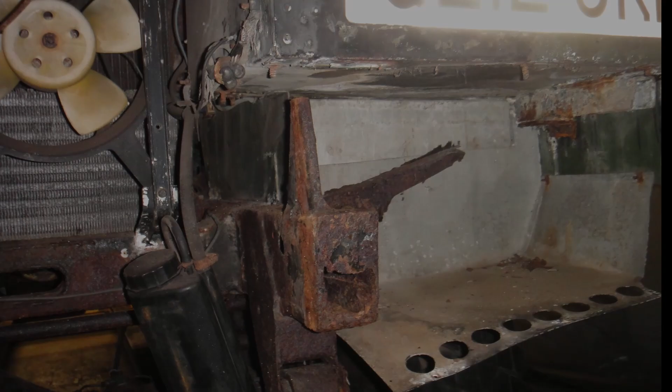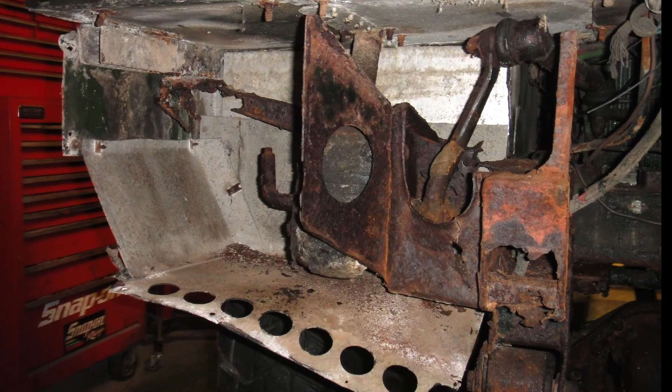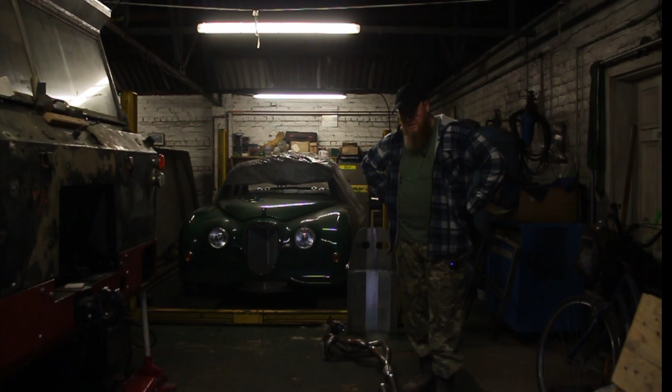Welcome to another portion of this Mk2 Jaguar wide-body two-door coupe, which I'm on with, and the Land Rover. I'm going to touch upon both and show you what I've been up to.

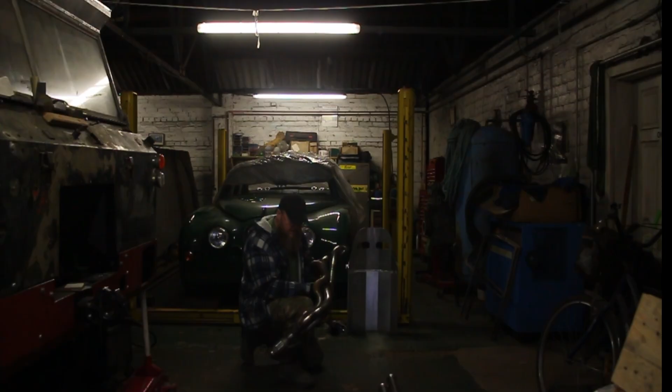So this is a forward set of headers, which I've probably shown you before, and I'll show you a close-up of that. I've welded all these up. What I did was, to make sure I could weld everything up, I removed this middle section of pipe so I could get everything around, and then I put it back in and welded the ends. So I welded all that pipe up as well, and then I just had to run round. So that's that one done.

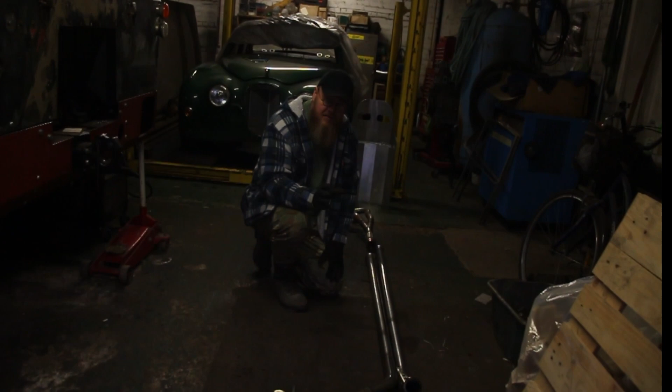Then the centre section - I haven't put anything in this. This engine originally didn't have catalytic converters in it. The later XJ40s, and I'm not sure about the XJSs, did put catalytic converters in, but this engine didn't run with them, so I've not put them in. And I've not put any centre section silencers in either. So I'm going to see what it sounds like, but I have got enough space to put some cherry bombs in, I think that's what they call them, which will just take the edge off a little bit if it's a bit too raspy. But anyway, so the centre section comes up to the IRS and then it's spread out and over. So this is the near side.

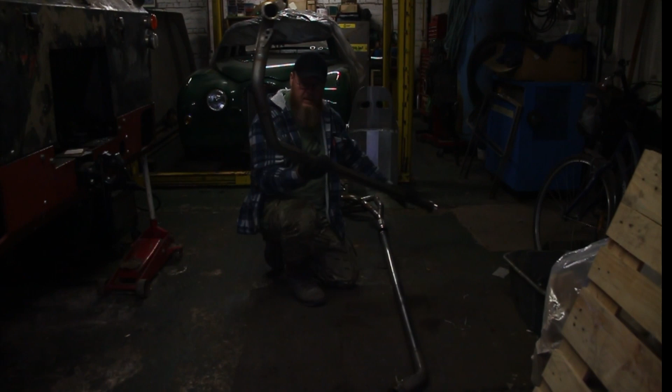So this is the near side. That's the near side one, and you can see how it comes over to the near side to come over the drive shaft.

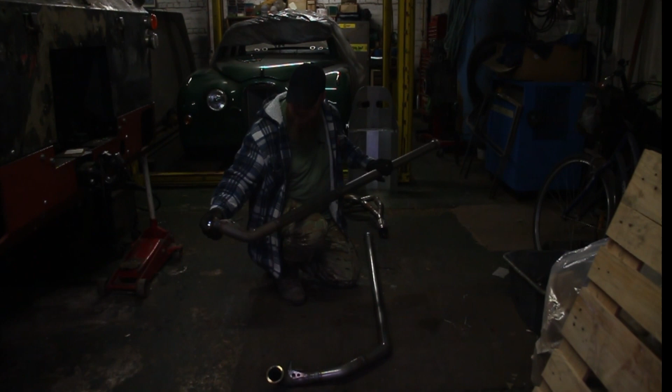The brackets I made are all stainless steel, so the pipe's all mild steel. The ends, they were supposed to be, well I thought they were stainless steel, but they're not - they're just mild steel plated, so I had to machine those to clean them up and to fit onto the pipes. But the brackets are stainless steel, which I made, so I didn't want to paint those, and same with the offside. So made the brackets, they're all stainless steel, welded onto mild steel. So that's the offside.

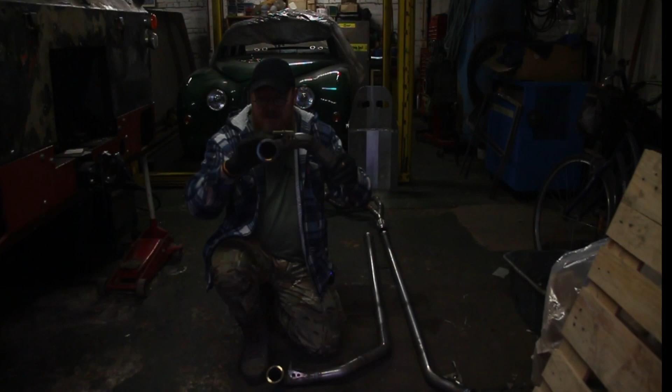Then the part comes over the actual drive shaft. This bracket here with the pin - there's a rubber mounting point inside the IRS that slides into it, so that holds it in position. Again that's all stainless steel onto mild steel pipe, and I'll tell you, those were awkward to make, to get that thing into the right position to sit on there. So near side, offside are slightly different in the bend, just because of the way it comes from that and everything, but they're pretty much identical.

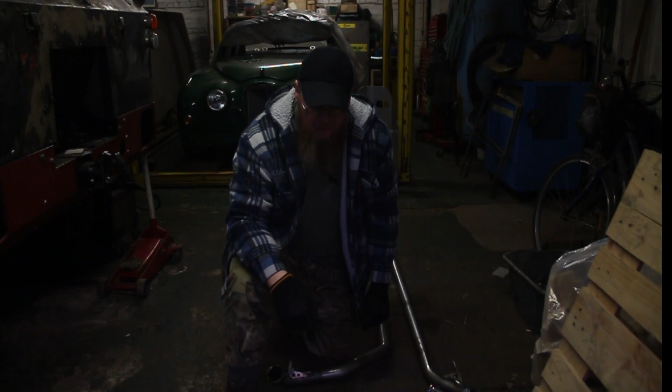So offside, and then the coupling - the two pipes that couple the ends that come over the drive shafts - and the V-band clamps. I'm sure I've shown you them, but they're under the Jag and I'm not going to lift it up just to get those out. But I'm sure those who know anything about making exhausts know there's a V-band clamp which I use for these. They just clamp and then they lock up.

What I did as well, I wanted - well, I've made these - but I tried getting some sealing slip joint pipes, and the company I inquired with for the size I wanted only had one in stock. And when I was in contact with them, I was asking them when they could tell me they'd have another one in.

So I wanted a pair, because I need a pair, and they wouldn't even get back to me until about 3 months. But by that time I was like, I need to get this thing done.

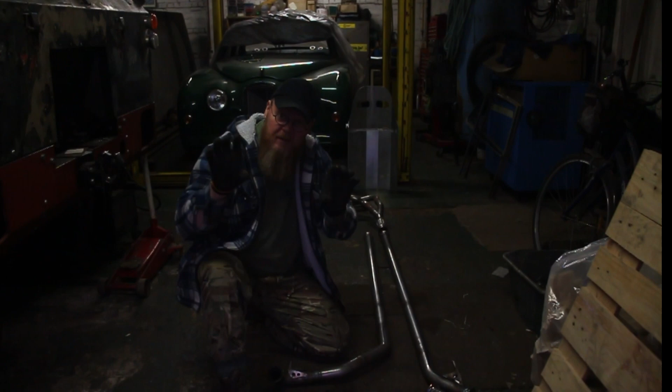So what I did was I went to work. I got some of this 2-inch pipe, put it in the lathe and machined it down, just touched it off to make sure it was perfectly round, because this is seamed pipe, not seamless. I made sure that was running concentric on the lathe. Then I had some old prop shaft, which was just right to be machined out to make the female part that goes over. Let me just get this here.

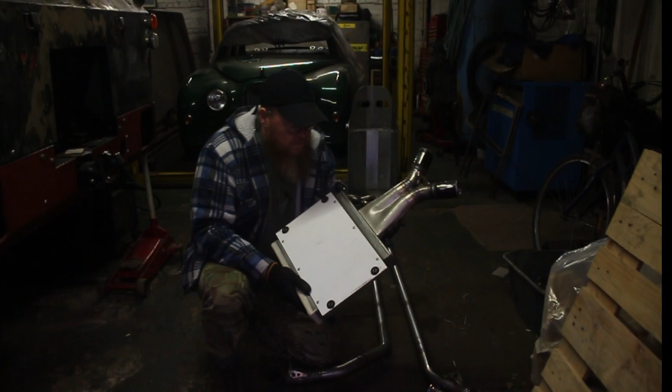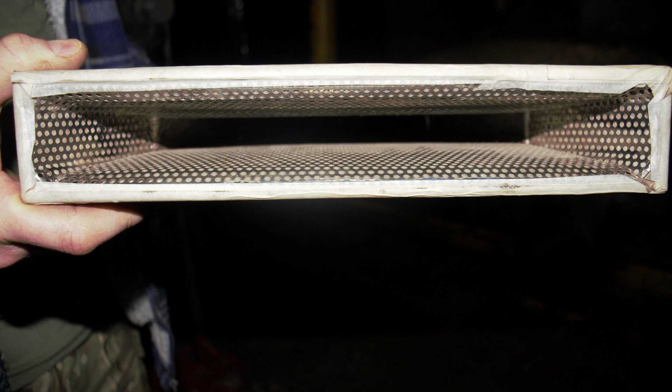So this is the rear silencer, and this is a fishtail, believe it or not, inside there. You can see where it starts to taper out, it comes down to there like that. I'll try and get some pictures to show you more clearly what you can see inside, and the meshing I've put in for the silencing, and for the gas to expand into this silencer box bit.

But anyway, so like I say, I machined these so they literally just go in like that, and that's their machine fit, and they seal perfectly. They won't even need anything on to seal these. So I don't know whether I will put something on to seal it or just leave them.

There is no restriction, obviously, because it's pretty much straight through. There's no baffles in here, so I don't think they would leak even if they were. But I don't know with the expansion rates, with the heat or what, I don't know, but we'll see.

But they needed to slide in, because when the diffuser's in, this sits inside the diffuser, and you literally can't get into it. So even if I had some V-bands or anything on it, I couldn't tighten it up because I can't get in. Which I know some people say sounds a bit silly, but it's not really, because I can put these slip joints in and they can go in and they seal perfectly well.

So that should be what it is, but we'll get some pictures. I've got a picture of the whole thing, which I'll put in the top corner. So that's the exhaust system done.

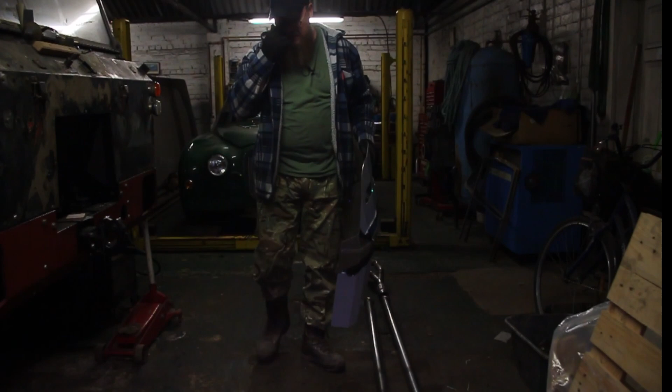The chair. Now I said the chair that I'd got and done. In fact, I'll bring it out. Just one second. Right, so the chairs that I bought. This was a chair that I bought.

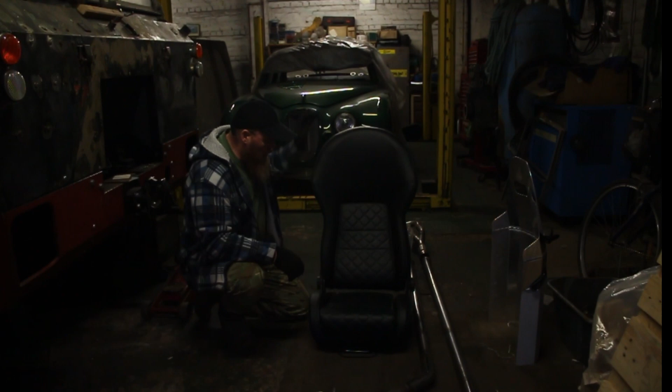I bought it so it could tilt forward, obviously, because I've got seats in the back. I wanted a bucket-like seat, but there wasn't anything really exactly what I wanted that would tilt forward, except normal modern car chairs, which I didn't like. I wanted it to look sort of sportish, but not too much, but have that thing where it would make the car somewhat accessible into the back, and yet still have that touch of sport in it.

These were the things that I found. I recovered them in leather, so all the stitching work I did. This was my first stitching job on the sewing machine I bought. I do have the pieces, I don't know what you would call them, where the belts come through. There was one there and one there.

Goes on there. Well, I made some aluminium ones because I didn't like exactly the shape and design, so I remade those slightly. But the width of it is really wide, because the car isn't that wide inside, and it's really close to the B-C post. And when the other chair's in, there isn't much of a gap, and I didn't really like this bit here. So I decided that I was going to make some

bomber seats. So I'm going to keep the lower half of this, and let me just move this out of the way. So I've started making this. So I designed this on CAD.

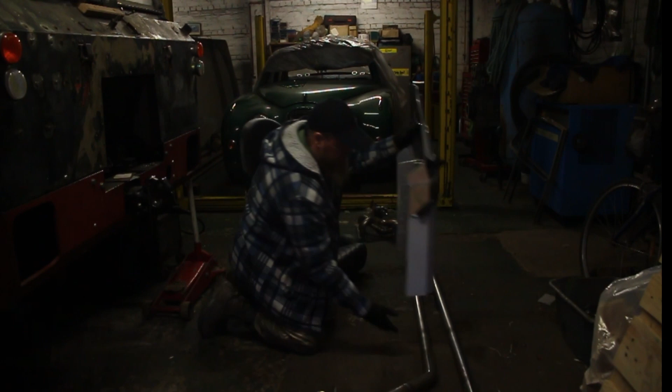I'm going to change it slightly, this edge here. I'm going to take this bit off here, cut it down there. But it's going to be covered, pretty similar to that. I've still got quite a bit of work to do.

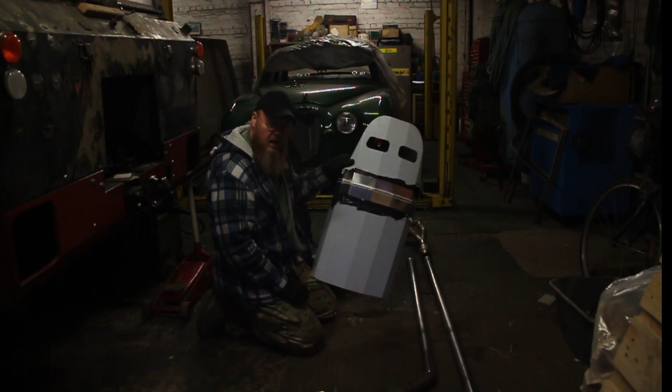So I welded it up there. There's going to be some frames coming down the back of here. Not sure if I've shown you on one of my other videos, the CAD work I did for this. I think I did, but I might put some pictures of that in as well, so you can see what it will look like. But this will go onto the, let me just bring this chair back here a sec.

So the hinges here, when I finish the bracketry on this side, this will bolt straight to that. And the idea is to do bomber seats, because they used these in the old racing cars, bomber seats.

Because it's so dark in the car, being black and green, it's really dark in there. So I thought one way to help lighten it up a little bit would be aluminium. Even though this will be mostly covered, if not all covered here, at the back it'll be all aluminium. That should help brighten things up, so light reflecting off it should help bring up the light in the car. It'll add a new dimension to the inside instead of just being all covered. So that's what I've got there, and that's the reason why I'm doing that.

And like I say, it narrows off here, so it doesn't look as if the car's all full with just this, because it is really close to each other with that. So that's what I'm going to do with that.

Right, so one of the things I've done is I bought an oil pump. This came off eBay, I think 20 quid or something silly, not a lot really. It's 12 volt, clips onto your battery, and I got this to prime the engines, both the Jaguar and the 101.

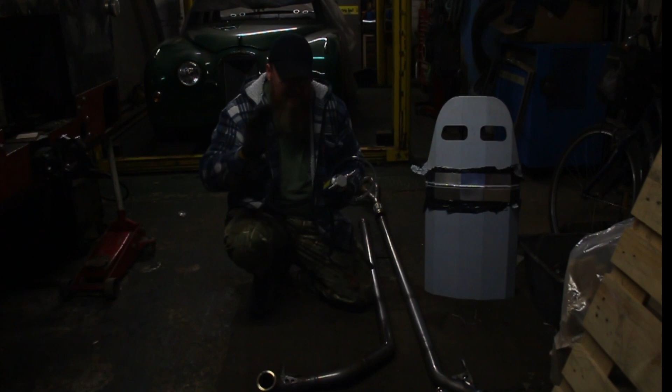So this will be doing the Jag and the 101. Dead simple, instead of messing around with hand pumps or just crossing your fingers that it's going to work.

Once I've got - what I did say was why the other runner isn't here - but just get this, hopefully I'll be able to show you.

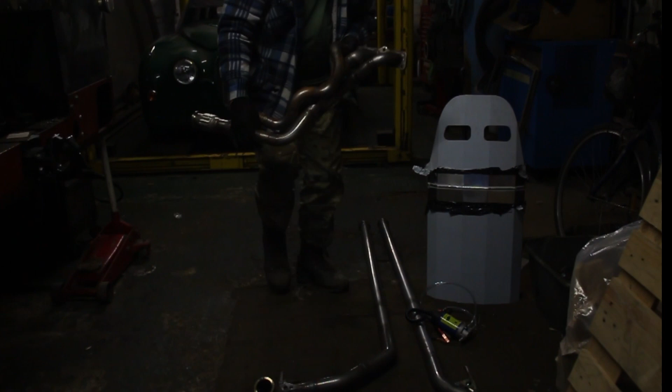Where I welded from the flange to the pipe, I had very little accessibility into the back. So when I had the centre pipe out, I had no problem welding it up. Even this one was okay when I put it back - I had enough accessibility to get in, just.

But the other one is tighter, because of the footwell that comes into the car. So I brought everything closer in, and I was hoping that I had enough access from the back here, but my TIG torch can't get in.

So I've welded the insides, and these will all be ground out so it's running flush and nice. But I don't want to just do that on the other one.

So what I've done is taken it to work, and we've got a smaller torch on one of the TIGs there, so I'm going to try to get in with that. If I can't get in with that, then I'm going to oxyacetylene weld it in. But I've not done that yet.

Christmas came up and that stopped me doing that, because I've had so many other things to do at work - I've just not got round to it. So that's why the other set of runners isn't here, because they're at work, just to finish that last bit of weld off. Once I've done that, I was going to get these ceramic coated, but I think I'm just going to paint them, to be quite honest with you.

So let's show you what we've got on the Land Rover, and then we'll wrap it up. So the Land Rover wheel stowage - said I'd show you the finished design. The only thing I've not done is the lock, which will hold it in position when it's stowed away. I've not decided exactly where that's going yet, or how it's going to be, but we'll see. I'll show you the stowage, and then I'll show you the formula.

It's an online thing that I use to work out the lever actuator force required to move the wheel into position.

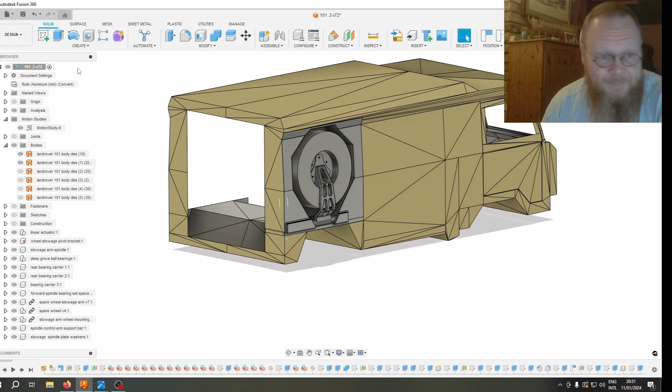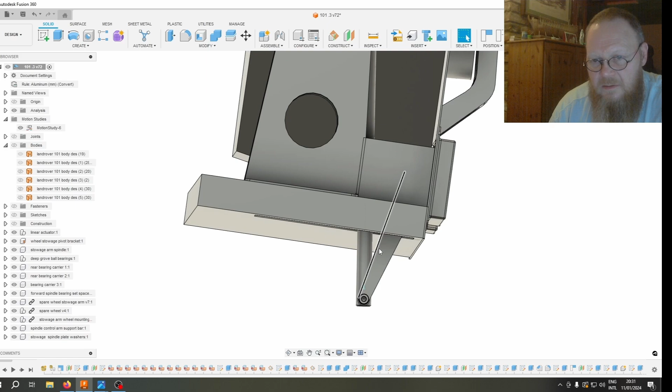So anyway, so we have the Land Rover - let's get rid of the body, and we'll look at the mechanism in a bit more detail. So you can see the mechanism here, or some of it. There's the actuator there, or I should say actuator lever. And there is the actuator itself, hidden inside this tower which I've made. So just a simple description of it.

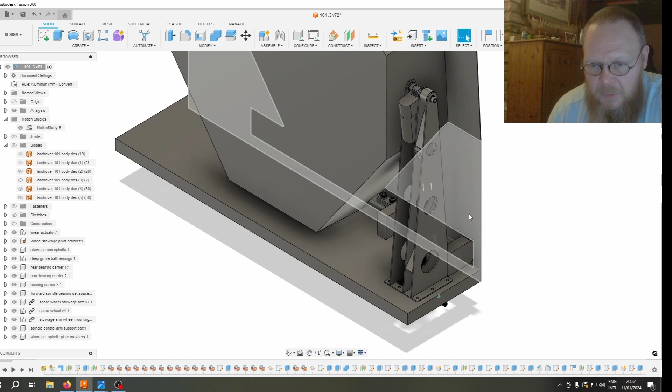I know it's pretty much self-explanatory, but what we have is this somewhat box section piece here. Instead of putting a plate down either side to make it into a box section, I've put this - let's see if I can show you - this highlighted S-type shape thing. That's sat in between the two plates, as you can see, and that'll be welded into it, and that just stops it splaying out.

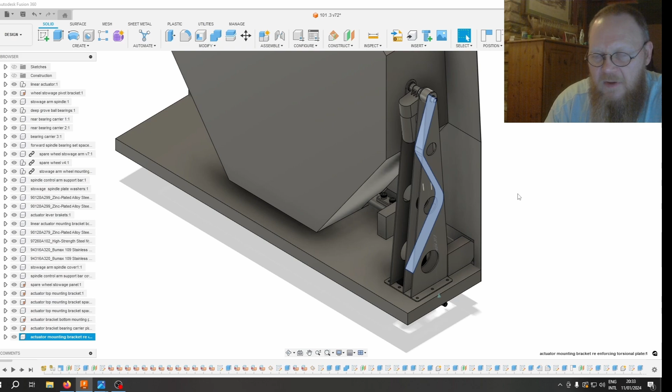Even though it's under extraction, it's being pulled apart because obviously when the wheel's being levered up, the actuator wants to move upwards, so it will be pulling on this. I didn't want it to be moving and buckling around, because this material is only 3mm thick. So I put this structure inside just to help support it, so it can't move from side to side, to cut down on any possible torsional movement. It should keep it relatively light, and it moves the stresses from one side to the other, backwards and forwards - just something dead simple, supporting the inner part of the structure as well.

And then I've got a single plate at the other side, which just helps support as well, pushing against it. I'd done a video of this last...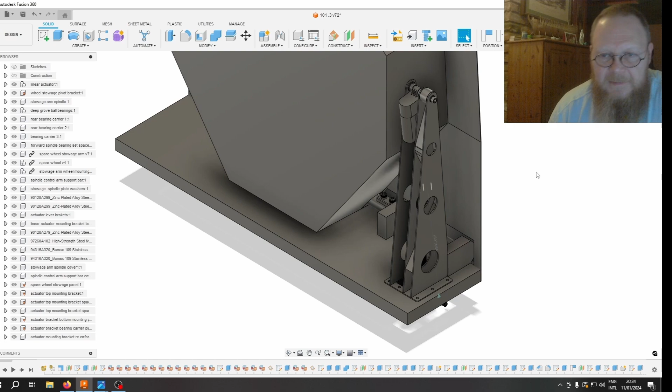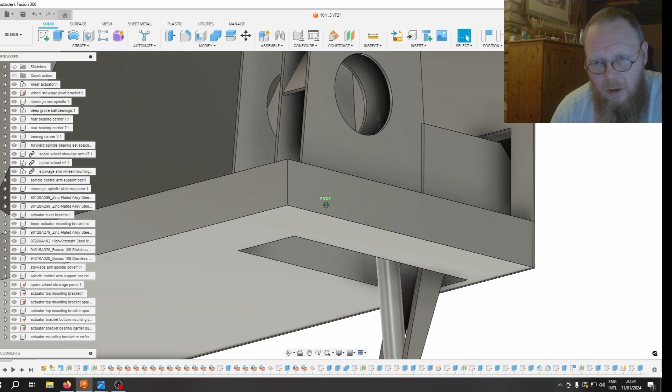Saturday. Yes, last Saturday. And then I came to realise that I got my formula wrong, and so my drawing was wrong. So when I realised what it was, I had to re-edit all this, and the actuator, because of the different lengths of actuator for stroke. And I got the wrong stroke - so this lever arm here, what the actuator goes onto, this actuator rod, I'd made this 100mm long. And I made it that long because the calculation I'd put in allowed me to make it that big.

But unfortunately I put the wrong numbers into the calculator, which I got online. I'll show you it here - just drag it across. So this was the calculator that I used. You can see the weight is obviously the wheel, X is the lever which the wheel's mounted to, and L is the lever which I'm going to put force to, which is F, and the fulcrum point is where the top of that triangle is, obviously.

So what I did was I put in this number here, but I put it in inches and not metric. So this is correct, is this? I don't know why, I must have been playing with it and put it back onto inches when it should be on metric. But it's in pounds, so

it's 40 kilos. I've been online and a lot of people saying the wheel and tyre is about 40 kilos. I thought it was about 50, but I haven't weighed it. So I put 40 as my basic statement. So 2.2 pounds to a kilo, so you get 88 pound, because everything else is in metric.

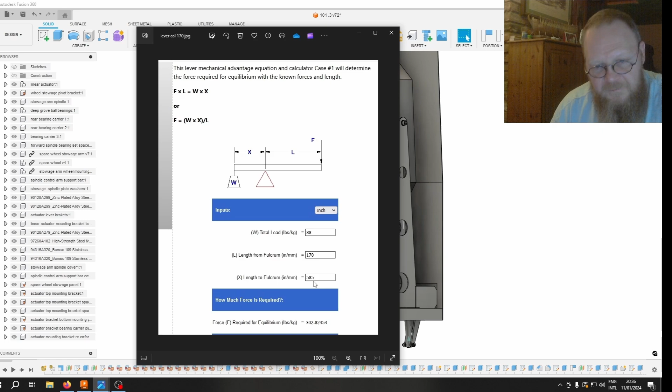So the length to the fulcrum, so that's, let me just move this over here. Let's get, in fact I better move this out of the way a sec, because otherwise it'll get rid of it. I'll have to mess around a bit. So let me pull this back.

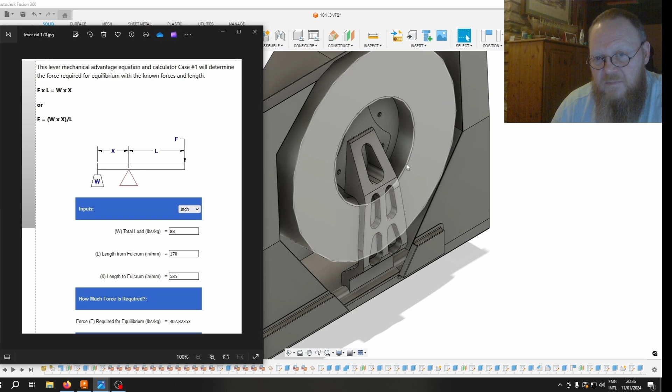So X is this here. So all this, and obviously this is the fulcrum point, is this rod here. So 585, so it's 585 I measured to there.

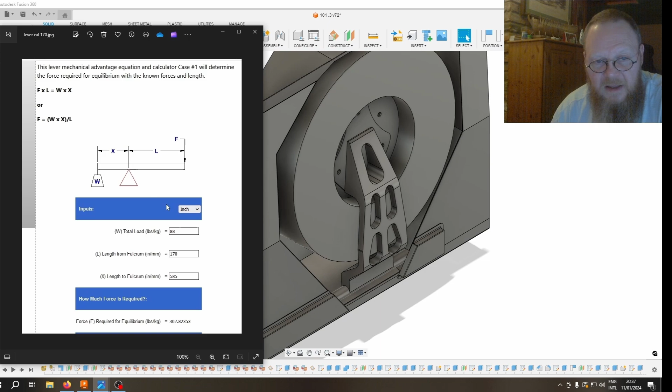And like I say, my original actuator arm was 100, but I've changed it because I did the recalculation through this, and the actuator, without going absolutely crazy, it would have been massive. And so this actuator is the most powerful one that I've found for its compact size and stroke length. So let me pull it back over again.

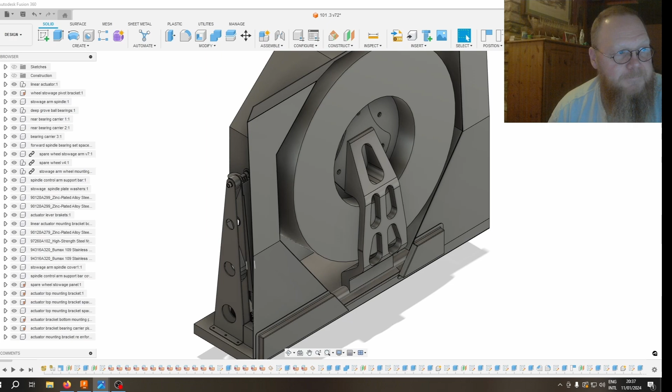So anyway, so I calculated it, and 170 millimeters, which is my L length there, would allow me to get away with this actuator I've got in here. This here, that's the actuator.

So I redrew all this using these calculations. So this calculation here says that the force required to give an equilibrium is 302.82353 pounds. So the actual actuator, let me just drag this across, explore this.

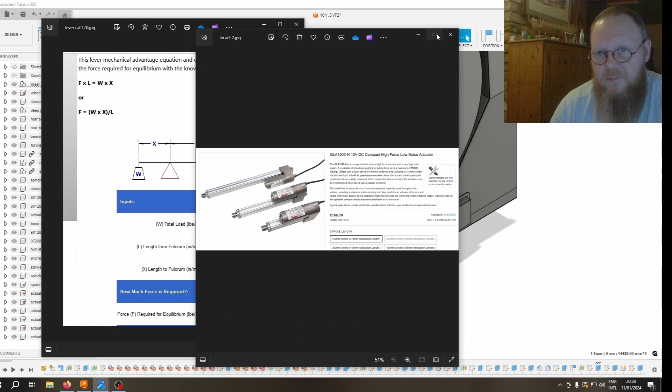So this is the actuator, and it gives me 337 pounds of actual force, or 152 kilograms of force. You can see it costs there. It's actually, they're really quite cheap, to say what they are. So it's got a 300mm stroke.

Originally it was a 200 one, but they're out of stock anyway now. But anyway, so it worked out better anyway, because I was struggling to find one until I realised the formula was wrong. But anyway, so 337 pounds of force this actuator will give.

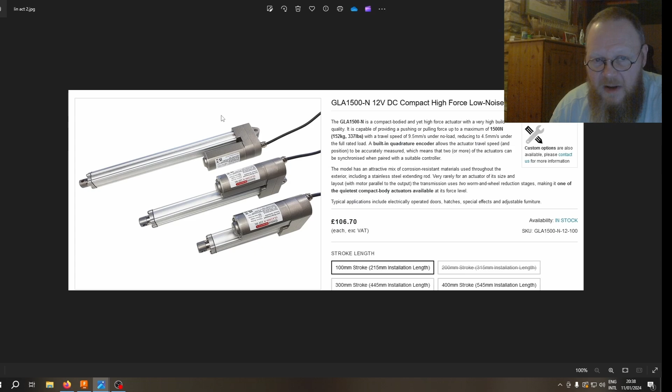So with having that, I'll get rid of that. So with having that, it meant that I had, let me just check my notes here, 16 kilos of excess force. So I needed 302 to get it to balance, but obviously I need to actuate it. So the extra 16 kilos will be what actuates it.

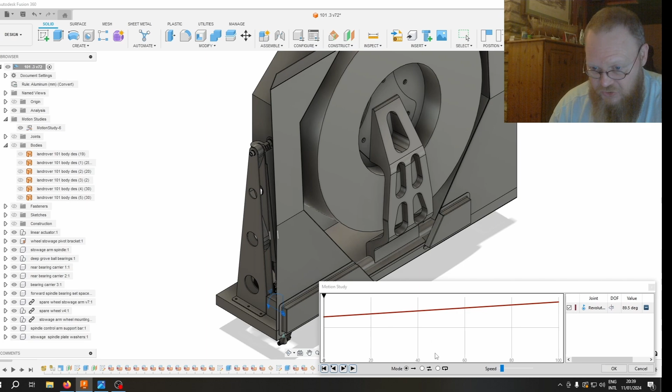So let me go back to here. Let's go into motion study, and let's just do a little bit of playing. So there. So the 16 kilos will make it do that, which that's what I'm after. And hopefully the 16 kilos should be enough to make this move without any problem.

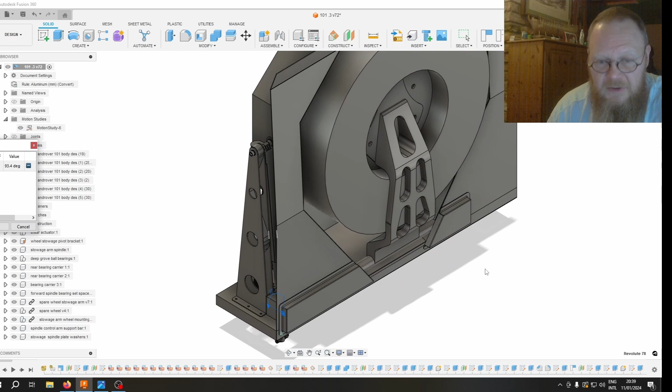Crossing my fingers. So yeah, and if it doesn't, well, I'm going to struggle because obviously the longer the actuator arm at the bottom is, let me just pull this up here. So the longer this arm is there means that I would have to have a longer stroked actuator, which means then I would have to make all these brackets again to accommodate.

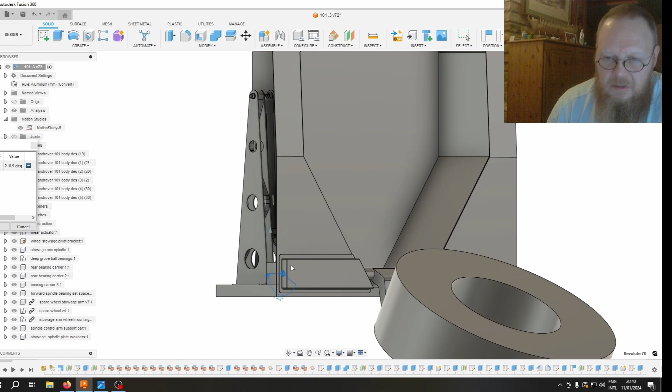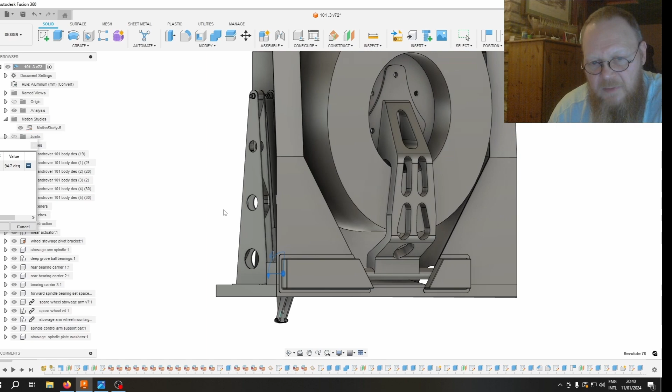I'm hoping that I don't need to do that. What I will do is I'll build one side completely with the actuator and check that out with a wheel on. If I'm satisfied, then I'll do the other side. If not, then all I'll have to do is change the bracket uprights here and the actuator lever arm there. That's the only things I'll have to change, and obviously get a new actuator that's bigger to accommodate the longer stroke. But I still have

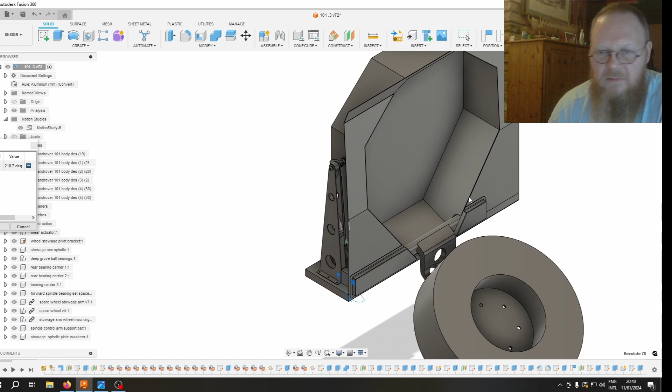enough area. This is the size of the wheel box, so I still have enough area to put in quite a bit more on that lever arm there to get this to actuate. But I think I should have enough. So anyway, so that's that, and I think that's pretty much it really for this.

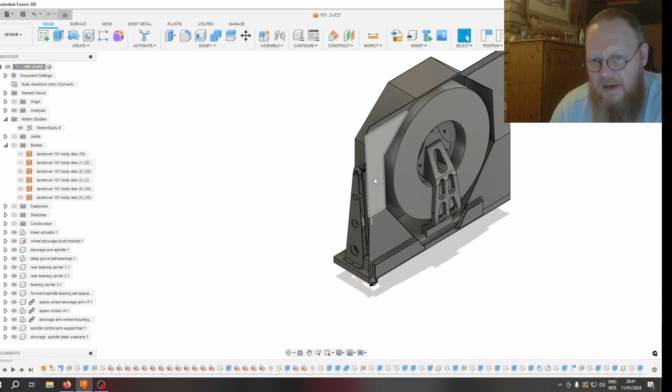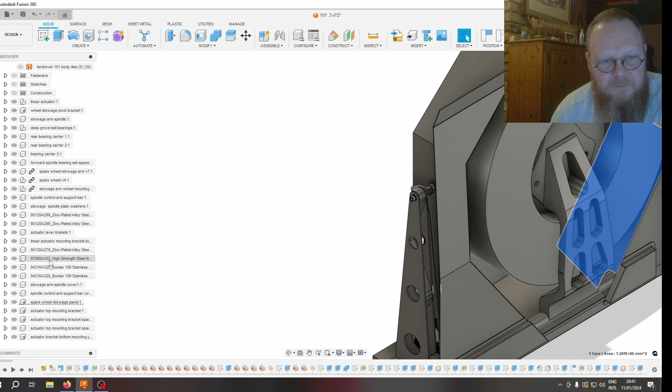Hopefully it'll be completely rebuilt for my next video, but I have the cutout in with the side panels. I've started the inner panel work now, which goes all the way around here. That's in, and I'm doing the other side now, then I've just got to get some more alloy sheet for the backs. Then I'm going to make the drawings for all these components, so I need to get all these drawings made up so I can start getting them machined up and cut out. So yeah, there we are for the CAD modelling.

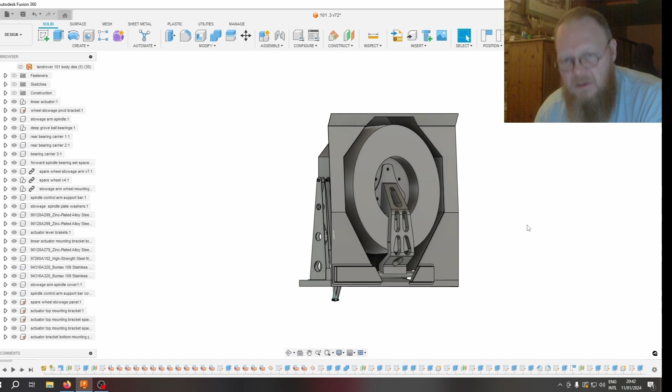One thing as well, two boo-boos I've made. They're not significant stupidities, but I wish I hadn't made them. If you look on the model here, on the side of the Land Rover, you can see where it tumbles home a bit, comes in, and then kicks back out.

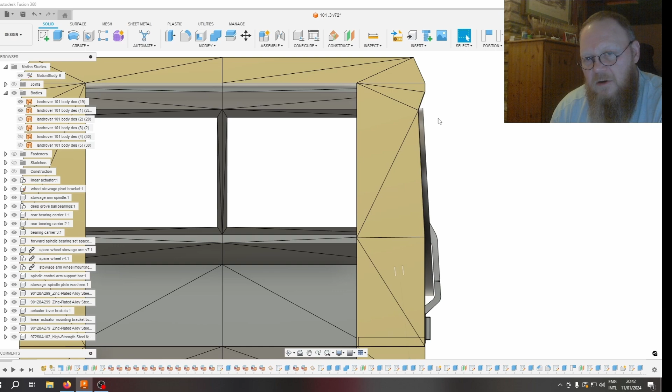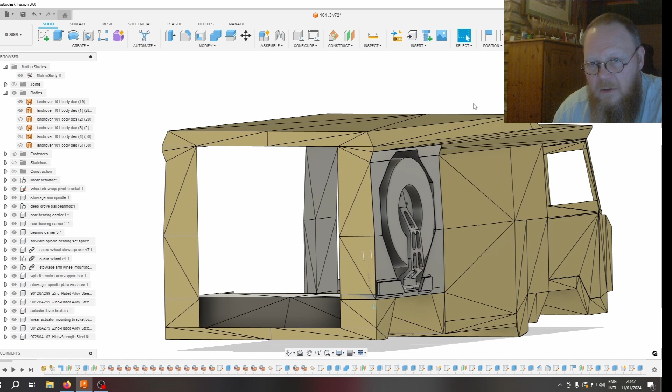If I put bodies on, let me pull this round here, you can see that when it comes back out to this panel, this horizontal plane here is in this face. So my first boo-boo was when I made the framework to put all the paneling on, I used some 2x1 inch box section to make all the frames, and I made my measurements from the top of the box section, so everything moved up. So this line here moved up further.

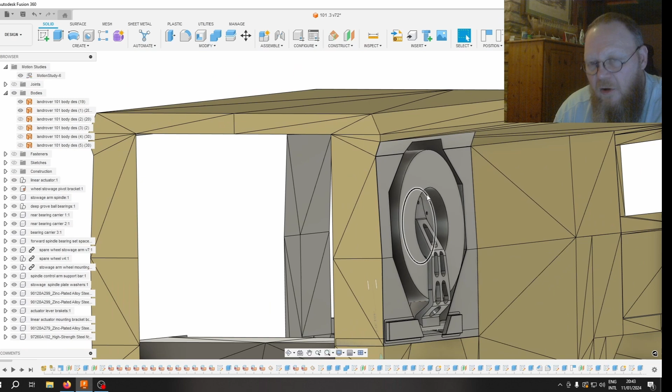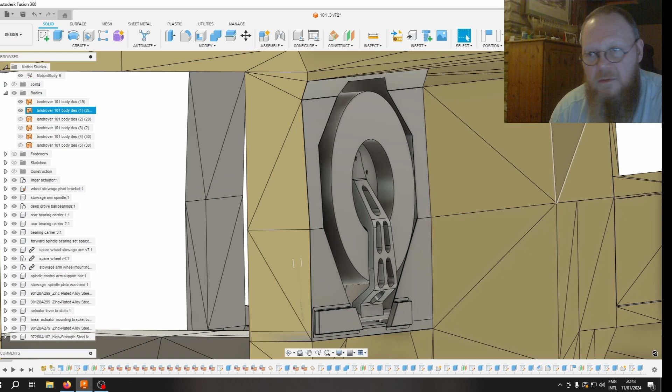But what I've also done, which I can't believe I did, well I can, it's because it's me, is when I did the drawing for this aperture here for the wheel to go in, I unfolded this panel so it was all flattened out into one straight plane to get the measurement. That was my error, because when I measured it flattened out, all these angles changed the measurement. So when that's brought out there, it rises a little bit, and when that comes out there, it rises a little bit.

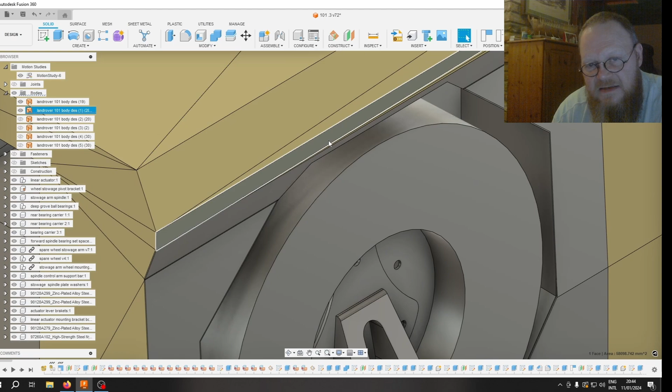I'll show you in my next video what I've done to fix it. It's actually in this panel now, this face here, so it comes up here and into here. Now it's changed this a little bit, because with these lines being up here, it's longer here, so it matches this here. It's actually the same as this bottom angle here, so those two angles are slightly different, but it looks the same now.

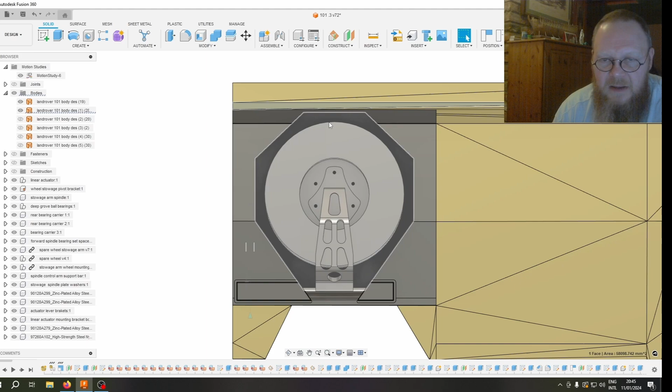What I'm going to do in this area here is put a light in to light it up, so when it's dark I can turn the lights on at the edge of the wheel box to light things up when I'm working on putting the wheel in the stowage, so I won't be working in pitch black. That means I'll be able to get rid of some of this height here, whereas before I wouldn't have been able to, or I'd struggle, it would have to be something sunken. So I'll be able to bring this down a little bit, but I'm going to put a light in there. That's my second mistake, which was just stupid really, those two mistakes.

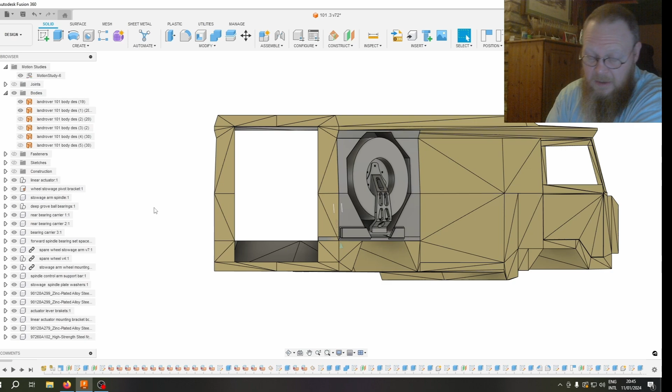Other than that, she seems to be right, and it's my first body I've ever made as well, so I'm quite chuffed with what I've got so far, and I think it's going to turn out really well. Not wishing to blow my own trumpet, but it does look quite good, and the people who come and have a look around now and again are quite impressed with it. So yeah, there we go, back to the video.

So the wheel stowages, I'll put in a video of the actual stowage operating. I've shown bits of it before, but I've pretty much finished it now. I've just got a clip for when it comes home and locks into place, a lock, I should say, not a clip, just to make sure that when it's stowed away, that's where it stays. So I've just got that little design work to do, but everything else is done.

So I put the flat paneling on, I've cut it out, which has been a bit of a pain really. I've cocked up a few places while I've been doing this, but it's not a big deal.

So I put the top panel in, I've got the roof panel on now, which was a pain because I messed up there. I made the panel before I put these rest of these panels, so I had an extra width of 3mm, which doesn't sound a lot, but trying to fit the panel on with a 3mm interference, I was having to knock and bash it around, and we were messing around so much, and then my pop rivet gun, which I bought, decided to die on me.

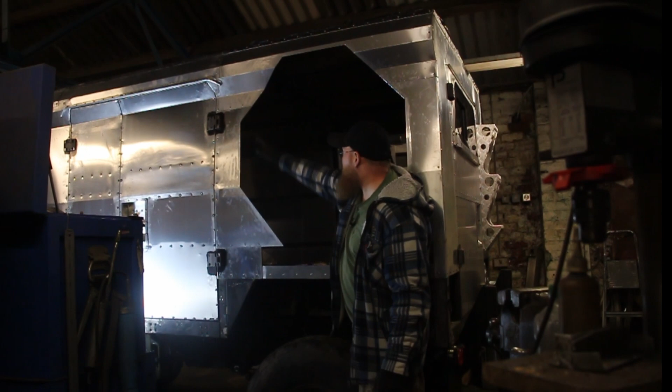It's just either going to have a gland around it, the actual bar, so it'll be all sealed, and like I said, the water runs off down to here. So I'm not sure exactly what I'm going to do in relation to these bits, how I'm going to join them together or make it one, but we'll see. I'll have to mess around a bit.

And then I've got one sheet left, but I'm going to need another sheet if I make these in one piece either side because of the lengths. So I'll need another sheet because obviously the big panel that goes in the back. So yeah, that's where we are with that.

It's coming together, it's coming together. It's slow. Fuel tank - I've got the fuel tank on, so we'll go around there and quickly look at the tank and the straps and things I've done. That went together quite well, even though I had to buy another rubber filler neck pipe, which I was upset about because I thought the one I got was okay.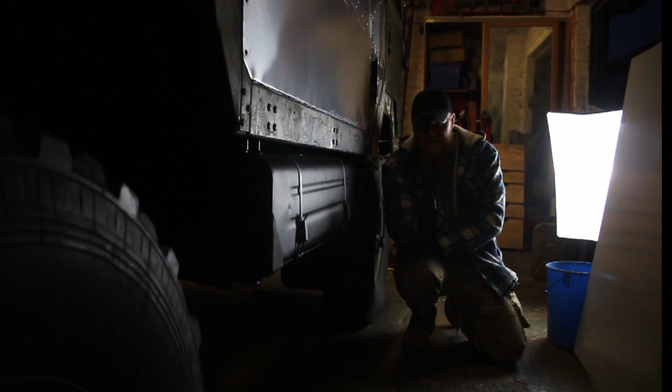It's come together alright, it's in. Cross fingers, it shouldn't leak, with what I've done and the repairs I had to do on it, and same with the cradle. It all went in. I had to make a mounting at the back, some spacers and things that went in between the mounting bracket on the spring hanger and the cradle, so I made those up at work out of nylon.

I'm not sure if I've shown that either. Anyway, I'm going to take some pictures because it's like black hole Calcutta in here and you can't see anything, so we'll take some pictures and you can see better, and I'll put those in, whether it's a corner or a full frame, I'm not sure, but we'll work it out.

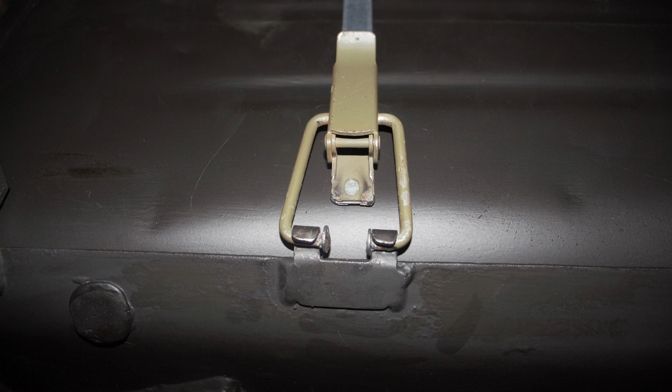But what I've done is, to fasten it down, I made some straps, so I made some brackets that went onto the actual cradle, either side. And then I made some straps, and I had some hooks, so I modified them, cut them to length. They fit in there, and then it just clips up, and now that's held down.

I did show you when I was fitting this up that I got some sealant, so where it was originally soldered, I put the tank in, I put the sealant in, so it touched the tank, so the bottom of the tank on all the points where it was soldered is now supported by the sealant that's gone hard. That's actually turned out really good, because I was going to make some rubbers to machine to sit in it, but this worked out just as good.

So yeah, that's all done and dusted. The pipe's on, it was a bit of messing around. It's absolutely awkward, whoever designed these, it's like typical Land Rover. But anyway, I managed to get it all in. I've got new pipes to feed as well, and returns, so they're all on. And it's just a case of now wiring it up.

And the plug that goes on top of this fuel pump sender unit, I have no idea what it comes off, but I don't have the plug that goes on. So I've had to make something until I can try and find out exactly what this sender pump comes off. Once I know that, then I can get a proper plug, or cross my fingers I can.